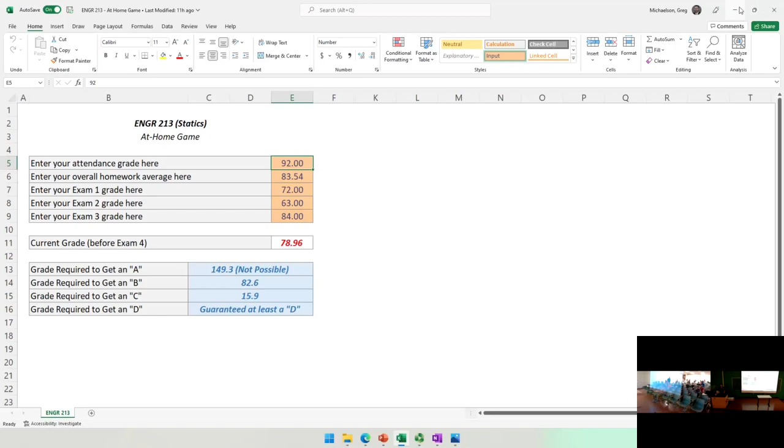Any questions on that before we get into the wonderful world of statics? Everybody good? Everybody get the code? We're waiting.

All right, okay, so with that, let's go ahead and get into the realm of statics. First off, I hope everybody got homework 3.1 turned in, that was the homework on cross products. I've got to believe that was a simple homework assignment, I've got to believe that wasn't difficult.

Just to recap, to make sure everybody's clear on what a cross product is: a cross product is one of the two ways we can multiply vectors. The first unit of the class was devoted to adding vectors; now we need to learn how to multiply them. There are two ways to multiply vectors: a multiplication that yields a number, a scalar, which we call a dot product, or a multiplication that yields another vector, which we call a cross product.

And we're going to find that's much more useful in the land of statics and ultimately in physics. When we define that vector, we define it so we know its predictable magnitude and direction. We say the magnitude equals the area formed by the parallelogram formed by the 2 vectors, and the direction is normal to that parallelogram or the plane formed by those 2 vectors. Then we went through a big derivation and found we could compute the cross product of 2 vectors by forming a 3x3 matrix and taking the determinant of that matrix, and it actually works out that way.

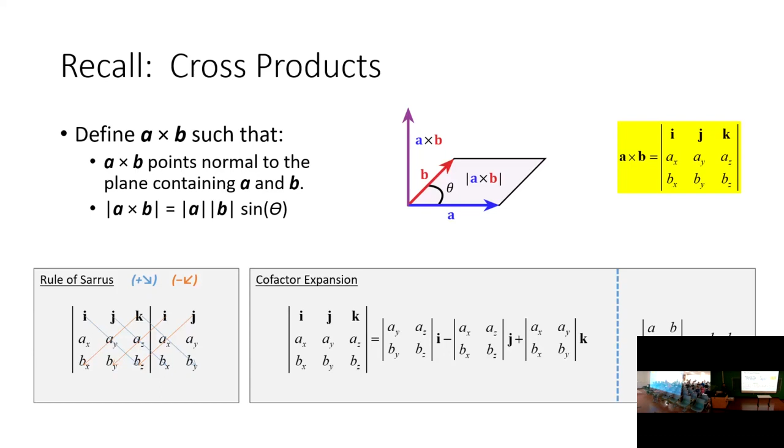Okay. So what we're going to do now for today and for the next few weeks is discuss what I'm calling rigid bodies, but there's a theme to this concept. And in order to explain that theme, I want to introduce two questions to the class. So let's take a look at these questions one by one.

Let's take a look at the one here on the left. How many of you have ever played Jenga? Okay, everybody knows what I'm talking about. If you haven't, Jenga is a tower of blocks that are interlaced, and one by one you take a block and place it on top, and you keep doing that. As you go through the game, the tower gets more and more unstable, right? I think everybody's aware of that.

Now, let's say I had that Jenga tower right here, and let's say it was in a rather precarious state. And let's say the tower is right here, and I go to him and say, I want you to take this tower and move it from here to here, with just the tips of your fingers.

Now let me ask you a question. If you were in his shoes, would you take it and move it like this, or would you take it and move it like this, trying to slide it from the bottom? What seems to be the most stable way of taking this Jenga tower and moving it from point A to point B? Pushing it from the top, or pushing it from the bottom? From the bottom. And I think everybody here understands that from gut instinct, right? That's simple to understand.

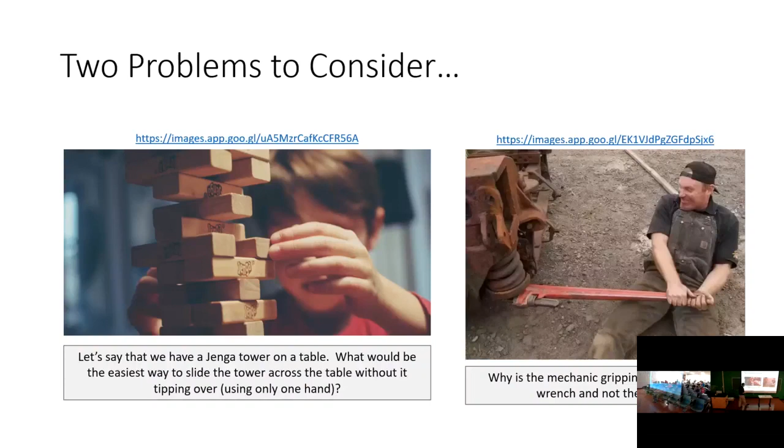So there's something to be said about the relationship between what happens when forces move away from one another and this concept of rotation. Like the Jenga tower, I have these two forces acting in equal magnitude, maybe opposite direction, but the further apart they get from one another, the more that Jenga tower wants to rotate. I've got this particle here and this force acting laterally on the nut, and the further away that force gets from the point in question, the more it wants to rotate. Does that make sense? That there's a relationship between the distance from the particle in question and the concept of rotation. That idea is really important.

I want to talk about the idea of translation versus the idea of rotation. Newton's first law says an object that is at rest or in motion will stay at rest or in motion until acted upon by an outside force. What does motion mean? Is motion only translation? So if I have this calculator and I move it from here to here, yeah, that's motion. But is there a way of moving that calculator without translating it?

No. Would you want to be around that seesaw on the playground? I wouldn't, because that's how somebody gets hurt, right? Because while the system is in equilibrium from a forces standpoint, that system is obviously going to want to rotate. So the idea is that when forces are non-concurrent or away from one another, we need to start to consider the possibility of rotation.

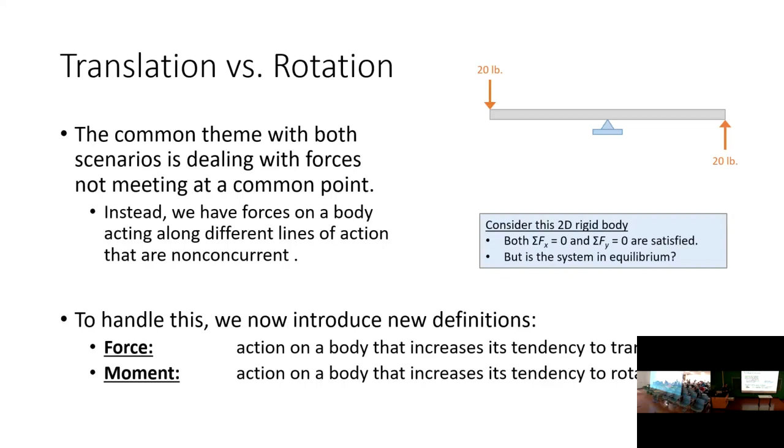Whereas a moment, I'm going to propose, is an action on a body that increases its tendency to rotate. What we're dealing with now are rigid bodies, meaning non-concurrent force systems. In the first module of the class, every problem dealt with situations where all the forces met at a common point, and we never really needed to worry about rotation. Now we do, because the forces are not going to meet at a common point, and so we need a formal way of addressing that. We need to understand how to ensure that the systems we are analyzing and designing are not only not going to translate, but not going to rotate as well. That's where the introduction of a moment comes into play.

So I've got some applied force F, which I can represent by a vector. I'm also going to define some new vector R, a position vector. R is going to be measured from the point in question to the point at which the force is applied. And I propose that the moment can be defined as the cross product of R and F. So R cross F is our formal definition of a moment.

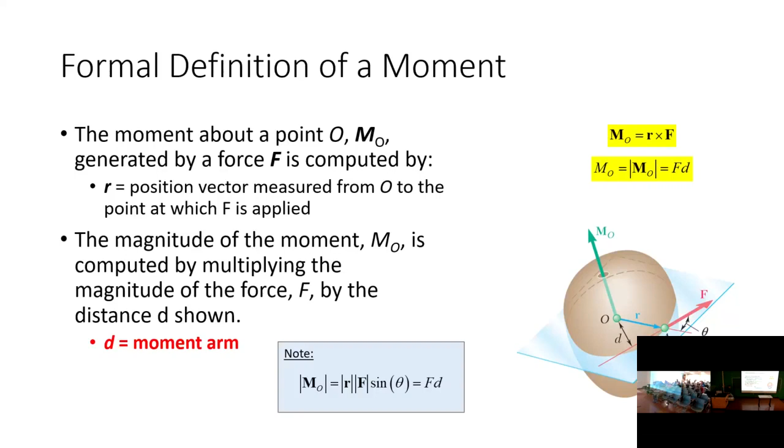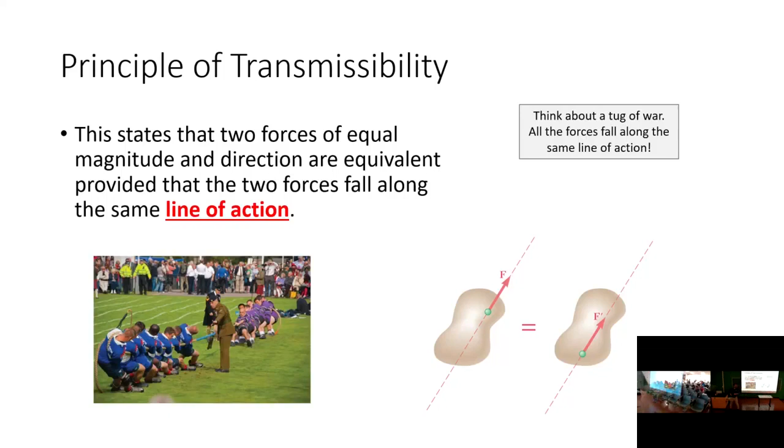So I can take those values and move them along the line of action, and I achieve the same static equilibrium if I'm talking about forces. What that means is that we have a better definition for R, and this is why R and D sort of co-align.

Let's go back to our definition of the cross product. Remember, the magnitude of that result has to be the area of the parallelogram formed by the two vectors in question.

I have here a little animation that shows a parallelogram with a fixed base, but the angle is changing. If you look, you can see how the parallelogram is shifting back and forth. But what if I told you that throughout the entirety of the animation, the area of the parallelogram remains unchanged? It does not change at all.

In terms of the relationship here, if you wanted an analogy, the base in this case represents our force in question, right? So we have some point out in space, and there's a 20-pound force pointing this way.

Now R, here's a better way of defining this position vector. R starts at the point about which moments are taken, and it points to any point on the line of action of F. So imagine this is our line of action, and let's say here's our point. So R can go from here to here, here to here, here to here, here to here, here to here.

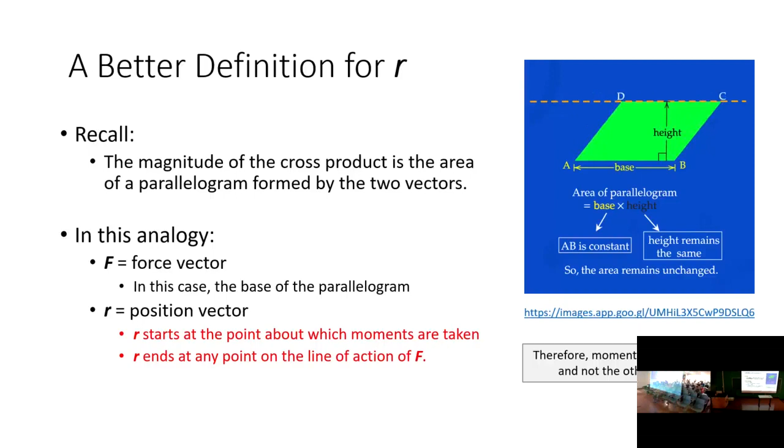Now to make that point and illustrate what's going on with the concept of moments, we're going to do an example, okay? Let me pull up the notebook. This example takes a little bit of explanation, so I want to go through how we're going to do this.

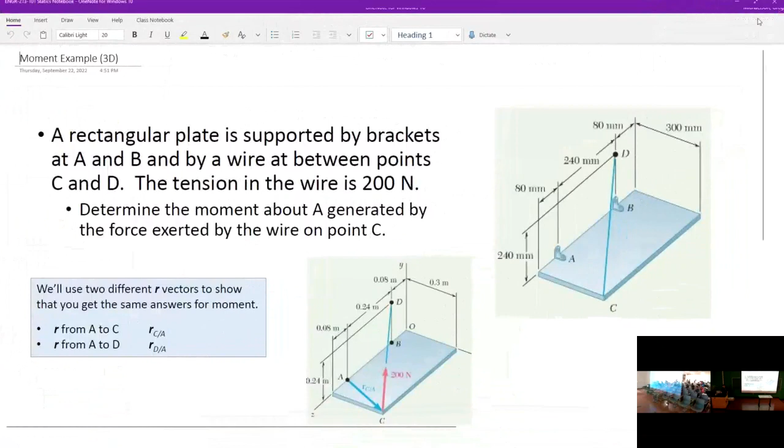So what we've got here is a rectangular plate, and it's being held up by, to be honest, a lot of the physical characteristics of the system don't really matter. But I have a plate, and it's being held up by some brackets. What I really want you to focus on is this wire, okay?

So I have a wire that has a tension inside it of 200 newtons. Imagine this table is the bracket, and I have a cable going from this corner all the way up here. That cable is keeping the bracket up, so it's yanking on this point with a force of 200 newtons. So I have a 200 newton force that's going up like this, okay?

What I want to do is figure out how much moment that force is generating about one of the brackets, in this case point A, okay? So what I'm going to need to do is define this vector here, so this is the F vector, and I'm going to need to define a position vector. The position vector is going to go from the point in question, in this case A, to the line of action of this force.

So the beauty of this is I could have a vector that goes from here to here, or I could have a vector that goes from here to here. Why here to here? Because this is the line of action of that force. So anytime that vector points along to the line of action of that force, I will get the same moment.

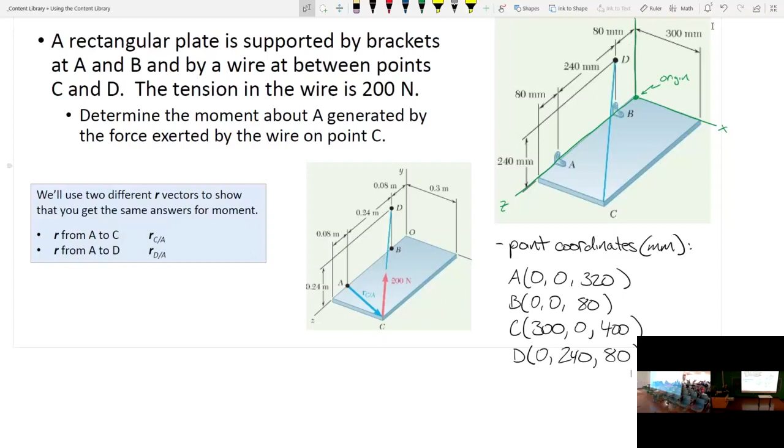So I'm going to call those position vectors, okay? I'm going to try and link this new notation to what you're used to already. So let's start off with position vectors, and we're calling these R vectors. Now, I propose that for this problem, we are going to determine two position vectors.

So we're going to determine a position vector that looks like this, and we're also going to determine this position vector. And I propose that if we cross either of them with the force vector, we will get the same answer, because both of those vectors start at the same point and end on the line of action of that force. Now, how do we determine these?

So let's start off with this vector here on the bottom. Now, up until we got to this point in the class, I think everybody would have called this vector AC, right? That's what you all would have called vector AC. Okay?

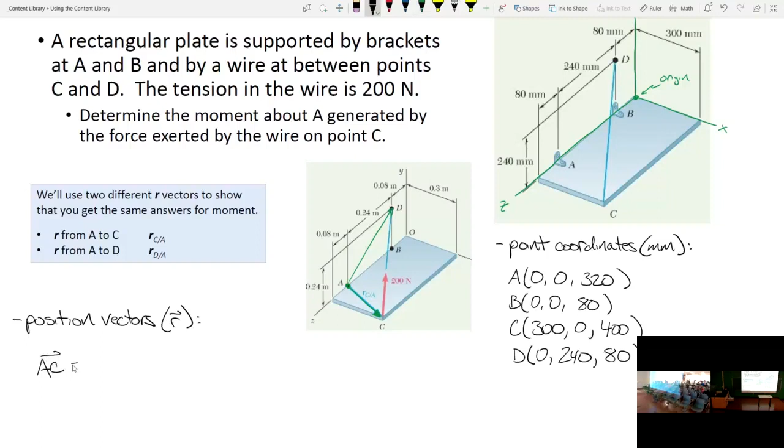Now, the textbook and the notation that we're going to start to use now is going to look like this: R, and it's going to say C/A. And what that vector basically means is that we are pointing to point C from point A. That's why the notation's like that.

But if you're wondering, okay, why, Dr. Mike, you're making it more complicated, why are you making the notation more complicated, why do that? Here's why. Check this out. I propose what we can do is take the coordinates of point C, the coordinates of point A, subtract them, and therefore, there's your position vector.

Simple, straightforward way of getting those vectors. And check it out, think about this. How do we go from point A to point C? How far do we go along the x-axis? 0.3 meters or 300 millimeters? How far along the y? We don't go up and down. And how far along the z? We go from here to here, which is 0.08. So it's a little bit more of a systematic way of determining those vectors.

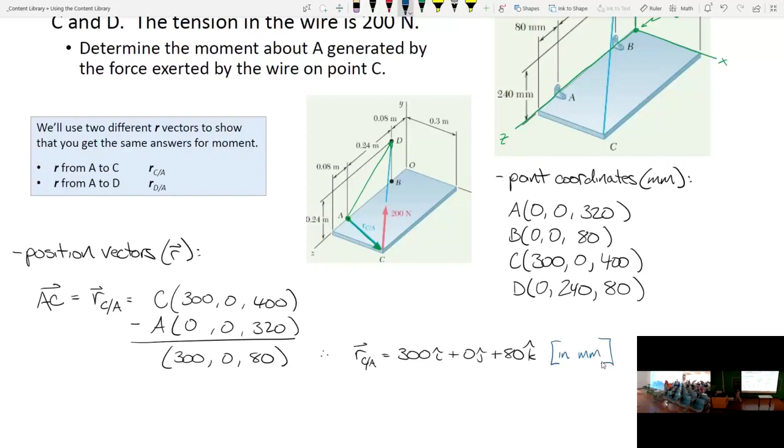Okay, now we are going to need to determine another distance vector or position vector. So I'm going to do this vector AD. So vector AD, I'm going to write as that, which points to D from point A.

And so all I'm going to do is take the coordinates of point D, take the coordinates of point A, and do some subtraction. So 0, 240, and then negative 240. And so our r D/A is 0I plus 240J minus 240K.

I want to stop for a sec. I don't want to rush through that. Does that make sense? Is everybody okay with this new way of determining these vectors? Okay, so those are our position vectors.

But now we need to determine a force vector. So how do we do that? Well, we need a vector. Wait, this is a vector in 3D. How do we define force vectors in 3D?

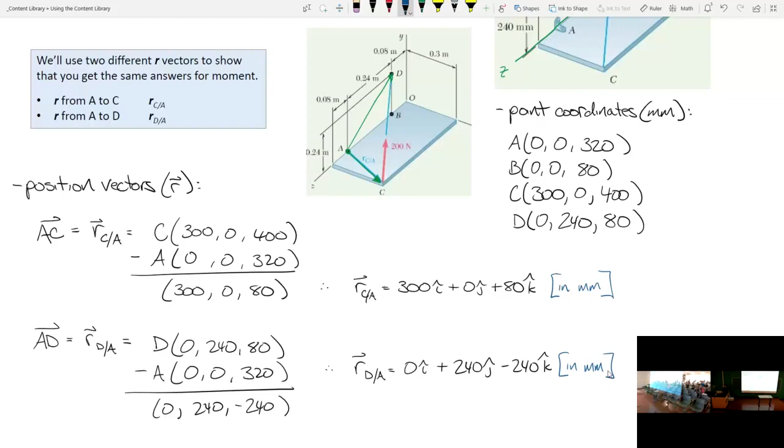Seems to me what we would do is we would get a distance vector, then we would turn it into a lambda unit vector and multiply it by the magnitude. Y'all remember that? So none of that changes. So we are going from C to D. All right? So let's go through that. Let's do our force vector.

So the first thing we're going to do is compute CD. We take D and C and subtract them. So D is 0, 240, and 80. And C is 300, 0, 400.

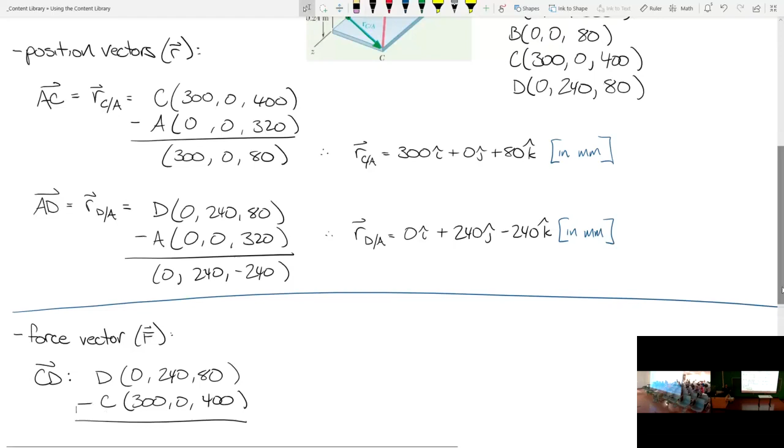So this is 0 minus 300, what is that? Negative 300. This is 240. And this is negative 320. Did I do that right?

Okay, so now we have CD, which is minus 300I plus 240J minus 320K. Now what are the units for that? Millimeters, right? Okay.

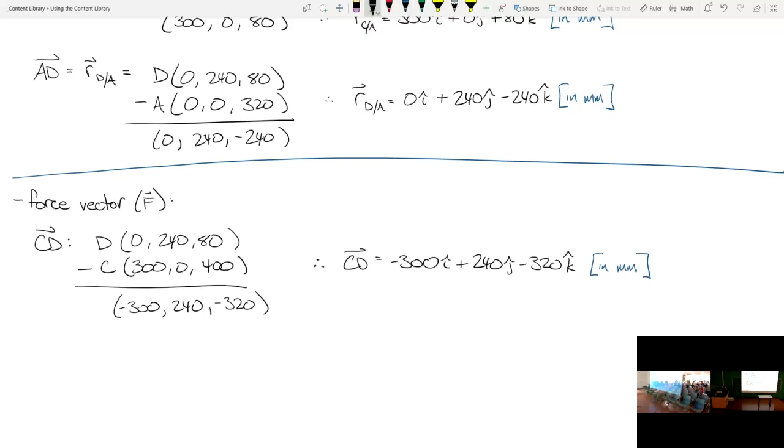So in order to determine a force vector, what I need to do is determine the magnitude of that vector. So I'm going to scroll down a little bit further. I need to determine the magnitude of CD. And how do I determine the magnitude or the length of a vector? Pythagorean theorem. So...

I think we need to break out our Casio FX 115 ES Pluses or similar scientific calculators for this one.

Here, we'll leave the units. What do we get when we plug that into our calculators? 500. Man, it's like I planned that or something. Do I have a second on that?

Okay, good. All right, so now we determine our unit vector, and the way that we do that is we take the original vector and we divide it by its own magnitude. So we get... oh, that's positive.

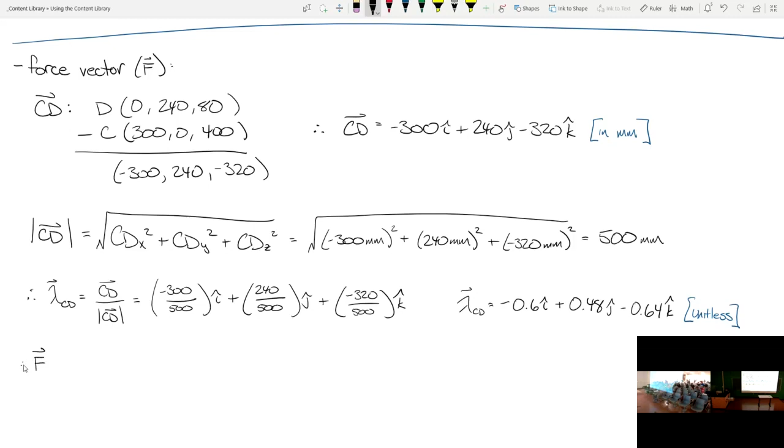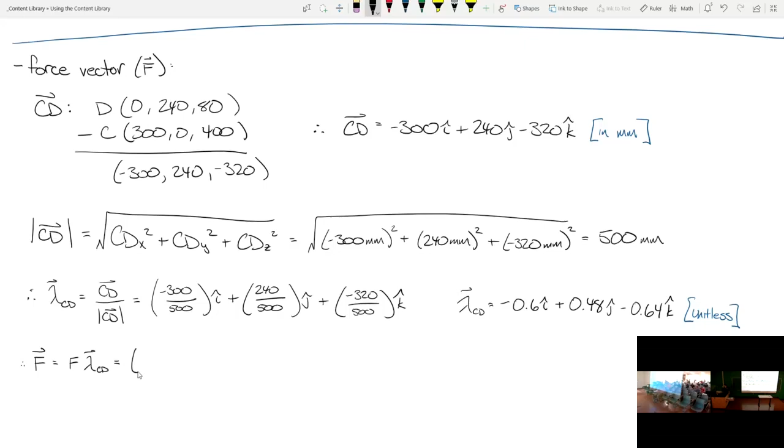Finally, we need the force vector, which is the magnitude times the unit vector. And what was the magnitude for this vector? What was the magnitude of that force? 200 newtons. So...

I might need a little bit of help on this. So what's, so 200 times 0.6, that's what, negative 120? Did I do that right?

What about 200 times 0.48? Positive 96. Say it again. Positive 96. And then 64, was it 128? Did I do that right? And, oh, negative. See, this is why I asked for seconds.

Okay? And the units for this vector are now in newtons. Okay, does that make sense?

So let's just take a second and summarize the important stuff that we've done so far. Okay? Because ultimately, what we're going to compute are cross products, or R cross F.

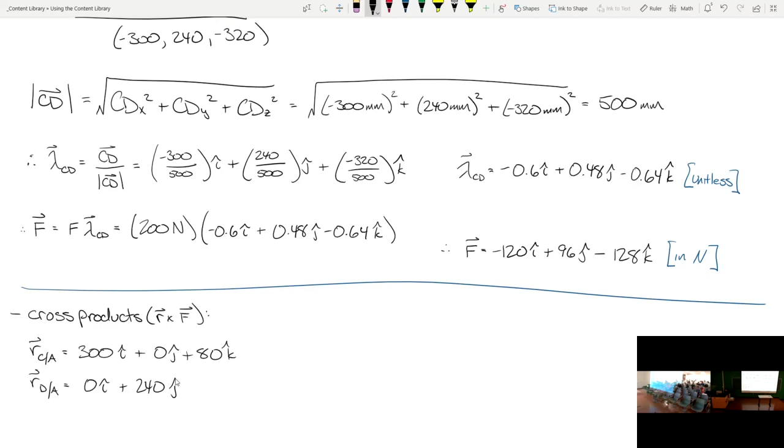And what we've done is we've got two R vectors. We've got an R from C to A, which is 300I plus 0J plus 80K. We've got an R from D to A, which is 0I plus 240J minus 240K. We did those parts earlier, and then we just got this F vector right here.

I want to take a second before we start doing these cross products, just to see, is this okay? Is this making sense? I mean, granted there's a little bit of new notation, but I don't think what we're doing is all that different. We're just writing vectors, describing vectors.

Sound good? Now what I'm going to do is two cross products, and we're going to get the same answer for both of them. So let's check that out. Let's start with the first one: R sub CA, and we're going to cross that with F.

Remember the way we do that is we write a determinant. We fill up our first vector first: 300, 0, 80, and then our second vector. These are going to be big numbers, by the way—just recognize that, and we'll talk about why in a second.

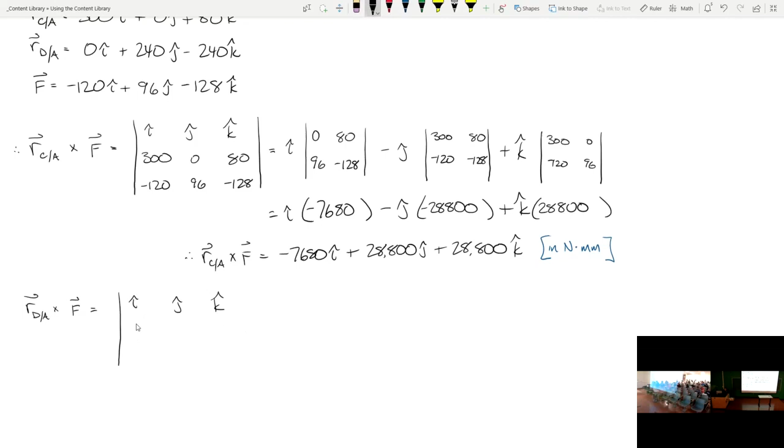So if we do that—oh sorry, wrong one. What I've got to do is use the second vector, but the same force. Watch what happens. So I fill it out, following the same pattern, just new values because it's a different position vector—same formula, different position vector.

So what happens if we do this first one? What do we get inside here? Negative 7680. Do I have that? What do we get for this one? Wait, do I have a sign wrong? Yep, I do—that's supposed to be positive.

So I get negative 240 times 120. It's almost like that's 28,800. What about the third one? I get 28,800. It's almost like R sub dA cross F equals 7680. It's almost like they're the same—I mean, look at that, look at that, and look at that.

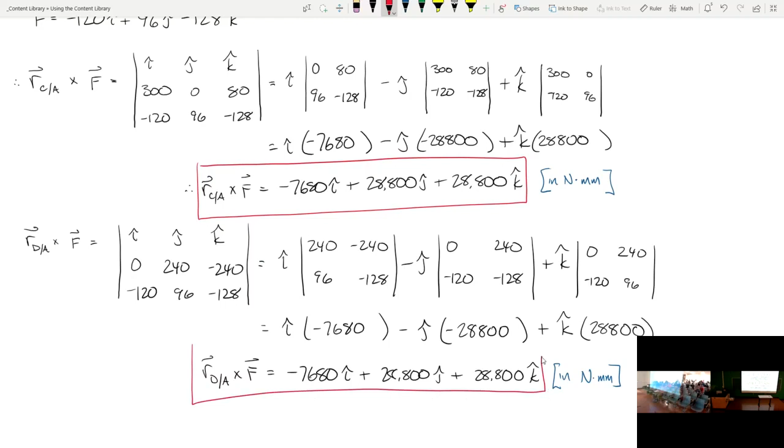Again, as long as your position vector goes from the point in question to the line of action of that force, you will yield the same cross product.

So just so everybody's aware, and then we're going to call it—the answer we're trying to determine, the moment about point A, is this vector: negative 7680 i plus 28,800 j plus 28,800 k. That's your answer. And yeah, that's a vector, so I need an arrow over that, and that's in newton-millimeters. Again, because we're taking newtons and multiplying by millimeters, and millimeters are so small, hence why the answer is so big. So that's the answer, okay?

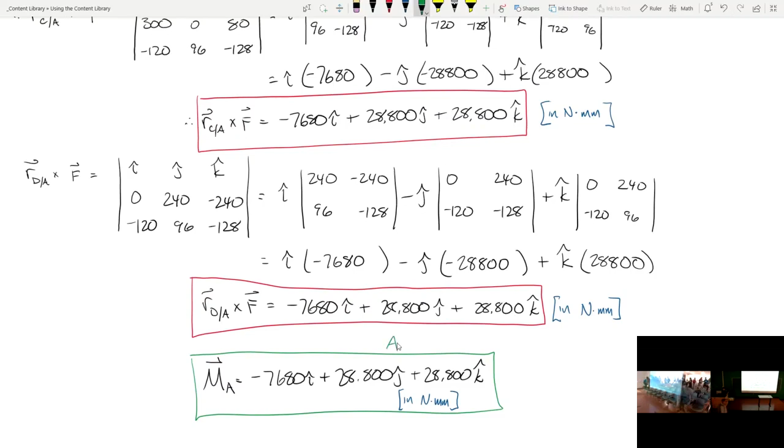Hold on. Oh, let me put the answer here. I'll text you.